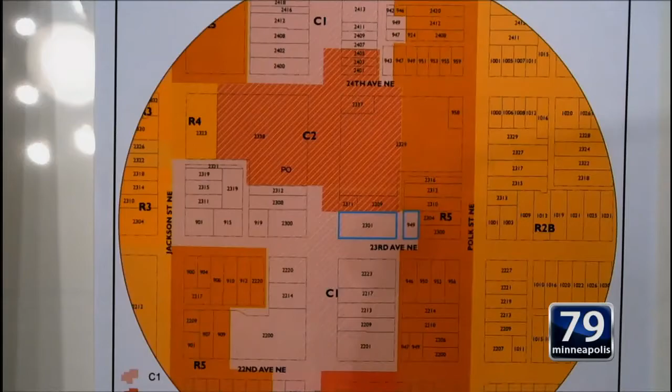There are 7 variances in site plan review. The applicant is proposing a 13,756 square foot 2-story clinic building. Just for some background, the property is zoned C1 Neighborhood Commercial District and is within the pedestrian oriented overlay district. The surrounding property along Central is mostly commercial uses, but there is residential facing 23rd, 24th, and Polk Street.

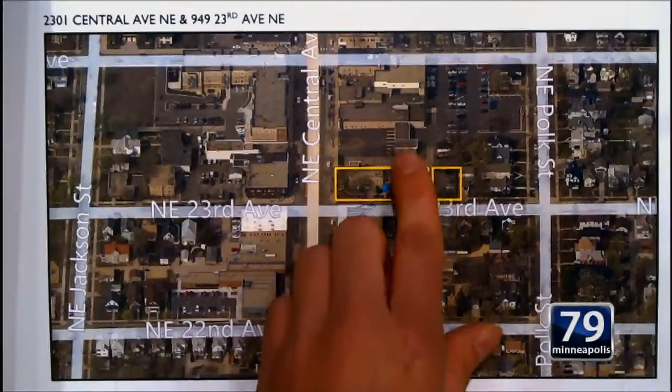The majority of the block, however, is made up of a Wells Fargo bank, their drive-through, and their associated parking lot. The applicant is proposing to demolish the existing building and construct an approximately 13,000 square foot 2-story clinic building. Their on-site parking would be located—let me grab a site plan for you.

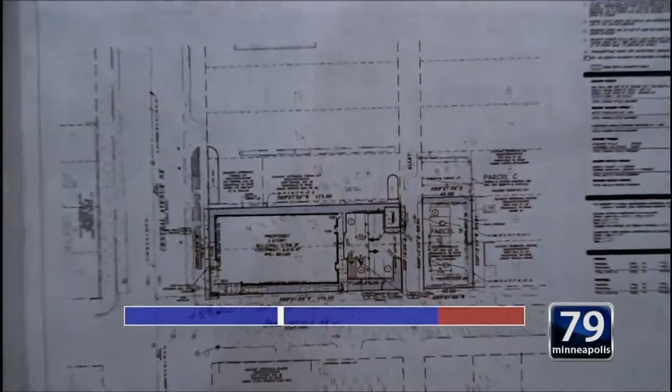Their on-site parking would be located to the rear of the building, about 8 spaces would be there, and then associated parking lot across the alley, that 949 23rd Avenue Northeast parcel would also have 8 spaces.

So this proposal requires 7 variances. The first variance is to increase the maximum size of a commercial use in the C1 district from 8,000 square feet to 13,756 square feet. The next variance is to decrease the minimum off-street parking requirement from the required 19 spaces to the proposed 16 spaces. There's also a variance of the pedestrian-oriented overlay district standards to allow the building to be set back 9 feet 8 inches from their corner lot line on 23rd Avenue Northeast.

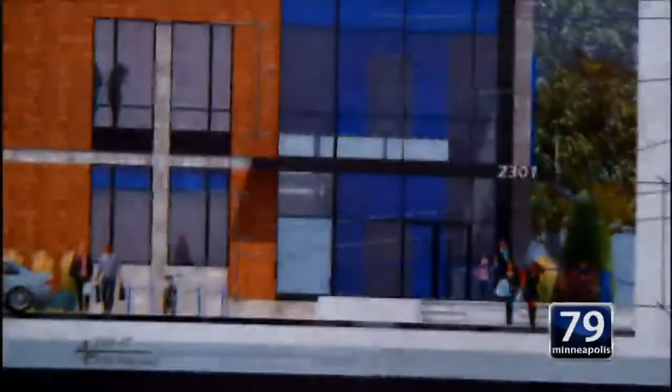And then there's 3 variances for this proposed sign, which would be on the north elevation of the building, which would be the non-primary building wall. And then there's 1 variance of the sign area for this decorative heart that's part of the logo sign on the south elevation.

So staff has recommended approval of the first 2 variances, the variance of the maximum size in the C1 district and the variance of the off-street parking requirement. I can address any questions you have about those, but I'm mostly going to focus on the variances for which we've recommended denial. So first, the variance of the pedestrian-oriented overlay district standard for building placement.

The PO district requires that buildings must be placed within 8 feet of their property line, and if you're on a corner lot, then you have to be 8 feet from both street-facing corner lot lines. In addition, as you're familiar with, the site plan review standards also require that buildings be placed within 8 feet of their property line.

So as you know, there's 3 findings that are required to grant a variance, the first of which is that practical difficulties exist in complying with the ordinance because of circumstances unique to the parcel. As you read in the staff report, staff did not find that there were any practical difficulties in complying with the ordinance. There's also significant policy and ordinance guidance for that 8-foot standard.

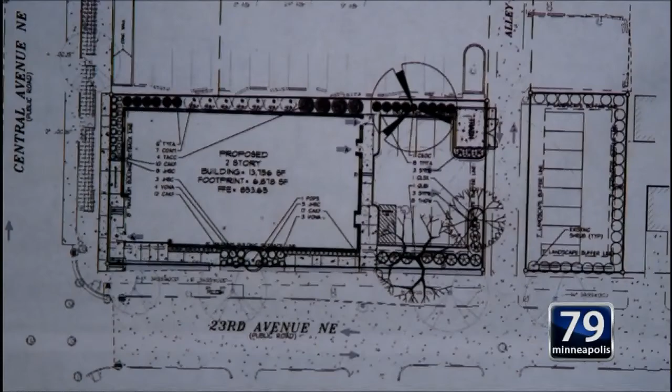Next, I'll talk about the sign variances. Let me go back to this sign. So this is the sign on the north elevation that is a non-primary building wall. The proposed sign is approximately 55 square feet.

So there's one variance for the location on the non-primary building wall. There's a variance for the amount of area on this wall from the allowed 0 square feet to the proposed 55 square feet. Then there's also a variance for the maximum area per sign in the C1 district, which we have established is 45 square feet. So there's the variance from 45 to 55. That's 3 variances for one sign.

Staff is recommending denial of all 3 of the variances, as we did not find that any practical difficulties existed that required the location of this sign on the non-primary building wall, or required the sign to be larger than the allowed 45 square feet.

The applicant has other opportunities for adequate signage and could install a projecting sign up to 16 square feet in area, which would face Central, or they could install the same sign reduced to 45 square feet onto the Central Avenue facade. I'll just note that they have not proposed any signage other than the address for the Central Avenue facade, which is a primary building wall.

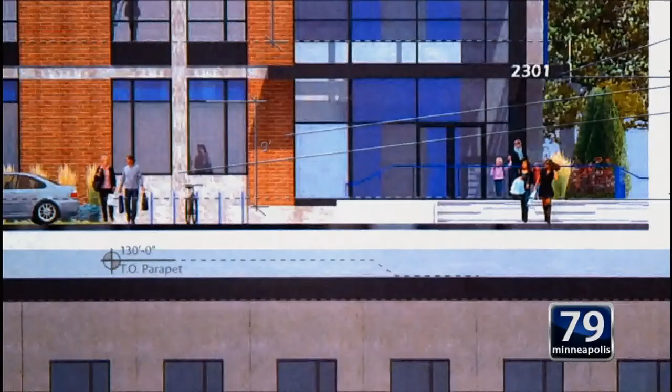Next, the sign on the south elevation, so that's the heart kind of sculptural sign. That sign is approximately 83 square feet in area as proposed. As I said before, in the C1 district, a sign is allowed to be only 45 square feet in area.

The intent for that standard is that the C1 district is a smaller scale neighborhood commercial zoning district, which would not require large signage. Staff also didn't find that there were any practical difficulties in meeting that maximum sign area.

In your packet, I also included this diagram, which shows where 45 square feet would leave that sign if you were to shrink it. Staff found that it would be reasonable to meet the standards in the ordinance and is recommending that the Planning Commission deny that variance.

Finally, to discuss the site plan review items, and just to be clear, in the agenda I think item H is listed as a variance, but it's site plan review, obviously. So the applicant is requesting 3 items of alternative compliance.

The first is building placement, which is also a requirement of the PO overlay district. Since staff is recommending denial of that variance, we're also recommending that the Planning Commission not grant alternative compliance for that building placement. The second item of alternative compliance being requested is compatibility of materials and appearance.

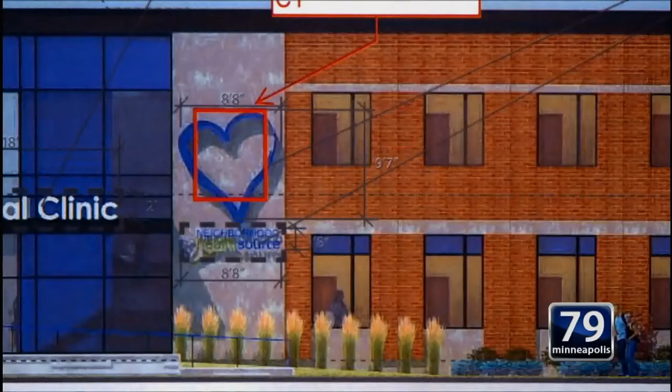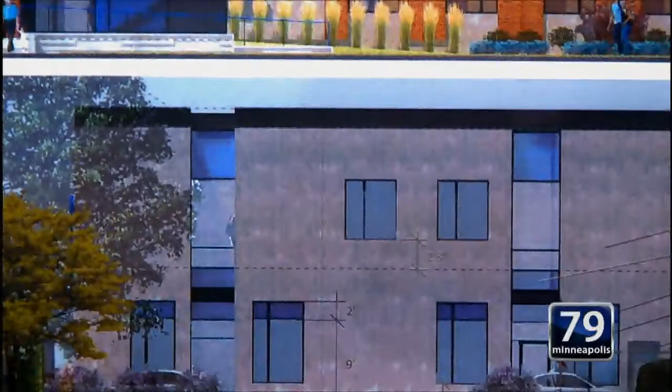The building is mostly precast concrete panel and brick. However, on the east facade, the side that faces the on-site parking lot, the applicant has not incorporated any brick, although all the other sides of the building incorporate brick. So staff is also not recommending that the Planning Commission grant alternative compliance for that, and instead has included a condition of approval that at least 10% of that elevation be brick.

Finally, the window requirement: 30% of the first floor walls facing an on-site parking lot are required to be windows. The applicant's proposal is only 26% windows on the first floor. However, because the applicant is providing windows in excess of their requirement for the second floor, as well as along the north elevation, and additional landscaping, staff found it reasonable to grant alternative compliance for that standard.

So with that, I can take any questions. Okay, let's see, commissioners. Commissioner Gesselman.

Lisa, I just had one question, and this may be for my benefit only, but can you explain what we mean when we use this phrase non-primary building wall? Sure, a primary building wall is a wall of the building that faces a street or an on-site parking lot.

So when it's a non-primary building wall, it doesn't face the street or a parking lot that is owned by or on-site.

Commissioner Kronzer: Just a question on the requirement to include 10% brick on the east side. How did you come up with 10%, and about how much would that be?

It would be about 200 square feet of brick. For the 10%, we evaluated all the percentages around all the different elevations of what they had already proposed, and I believe the north elevation was approximately 11% brick, so 10% was just an even number to be similar to that north elevation.

I'll try not to be too loud, but the adjacent parcel, Parcel B, seems woefully inefficient from how automobiles access and then subsequently probably back out into the alley to get out of that space. How does that Parcel B currently function now?

That's mostly the existing condition. It's not striped right now, so the only proposal to change is to do the striping where they've placed it on the site plan. And because these parcels are separated by the public alley, it's not considered one zoning lot, so the site plan review was really focused on the 2301 Central parcel. It's essentially just an accessory parking lot that we considered based on our design and maintenance standards of parking lots.

And then my last question, is partially the reason for the building to be set back increased because of the need for accessible entries? I think that's part of the intent, but I'll let the applicant speak to whether that's actually a necessity.

That was not included in their application materials as the reason for the indent; it was more of an architectural feature. Okay, thank you.

Okay, other questions, commissioners? Okay, thank you very much. Just for those who arrived a little after 4:30, we have now dealt with all items except for item number 4, which we are discussing. So everything else has been approved per staff recommendation.

So I will open the public hearing and ask first to hear from the applicant on this item. I'll just leave it for you.

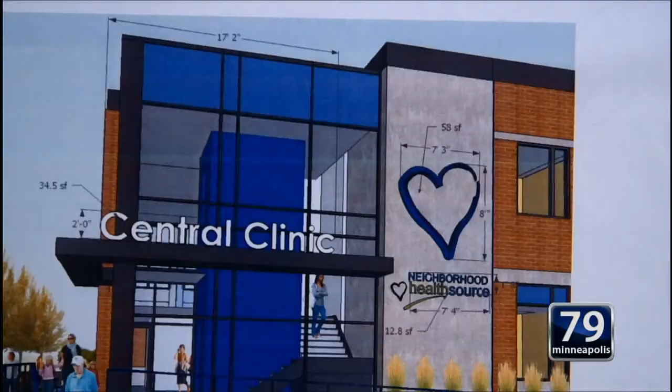Last item that we're asking for your consideration on tonight is this setback issue, and we would like to raise what we believe, again in careful consideration. I can tell you we spent a tremendous amount of time working through the site plan in this regard. And we believe we have a demonstrated practical difficulty with meeting that setback.

The first being the fact that our south and west boundaries are not right angles. They're acute angles, tighter than 90 degrees. So even if we had a perfectly rectangular building to front those 2 sides, we would lose roughly 2 feet along the length of that property. So we'd be down to 6 feet if we held the Central Avenue side, which we assume most folks would want the Central Avenue side held.

The second is a pretty substantial topographic difference between the front and the back of the site, which drives that front stairway to be 4 feet above grade to provide accessible access to the site. We have to hold that 4-foot grade, which requires a fair amount of ramps and compliant ramps to get access to the front door. So you see the predominant space on the south side of the building are those accessible ramps. They travel down from the parking lot to the public way, back up again to the front door. After those ramps come in, you have not a lot of leftover space in our configuration today.

If we were to give up the 1'7", again, we'd have even less to make that transition. So we feel that the topography of the site is a practical difficulty in compliance. The third, to a lesser extent, is the use.

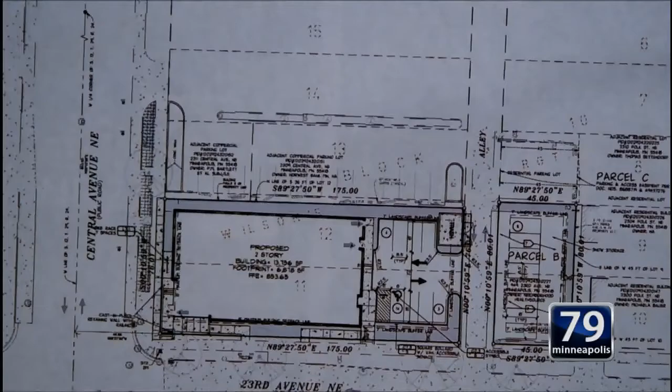And finally, the intent of the ordinance, we believe, is to create that hard urban edge. And if you look at the elevations in place, sorry, come back again. There's a series of retaining walls, again, to make up that grade difference right out on the property line at that curb edge. There's an architectural component around the glass atrium space at that corner.

We believe we have met the intent of the ordinance to provide a little harder urban edge at that corner. And I did not delve much into the architecture. We can if you have questions or interest there, but the majority of the budget on exterior architectural finishes was spent at this corner. This glass piece, that atrium, the canopy, the brick, those architectural components, including the walls out at the property line, that's where the bang was. That's where the dollars were spent, and that's where that energy is.

So we pulled that as tight as we could to the street sidewalk edge. We still have to provide practical access to the front door, so we have those retaining walls and so forth in there. So we, again, believe that the intent of the ordinance is met.

So again, on that 8-foot setback issue, we have pretty strong neighborhood support on that front. We believe the practical difficulty is the acute angle of that property, most significantly the 4-foot topographic change from back to front of the site. And again, I think it meets the intent of the ordinance and it's conducive to the use proposed.

So that will stand for any questions, as I promised. I know we're the only item we have today, but okay, let's see if anything else comes up, we'll be glad to answer. Commissioners, Commissioner Kronzer?

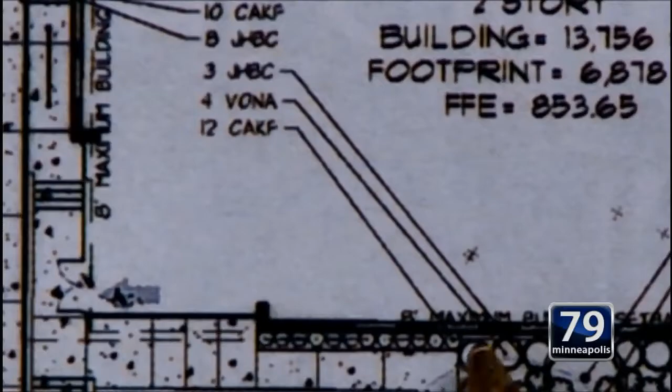So you can see they've drawn the hatched line as the 8-foot setback. They are meeting it for most of the building wall until about here, then it starts to deviate because the building is square. The setback's parallel to the street, so that's why it's kind of at an angle. Well, the setback would be parallel to the property line. So that's why it doesn't follow. Right.

And so a majority of the building that is not meeting this is primarily just that front corner glazed area, from here to like around here. And if it appears, from my perspective, that the building still kind of is canted a little bit off the property line through the rest of the building, so it starts out at the mark, and then it kind of tapers greater and greater till it gets to that point. Is that accurate? Yeah, that would be accurate. I think they might be a little bit even closer than 8 feet at the very end of the building, or the very east side.

So then, is it possible for you to tell, what is the actual setback of the glazed lobby from the brick facade of just the building itself? Like if it had been continuous with the brick, it still wouldn't meet the setback at that corner, but how much farther is it because it's set in? It's probably 1 or 2 feet different to that brick, just because of the tapering, depending on where that line is. But I can answer that maybe.

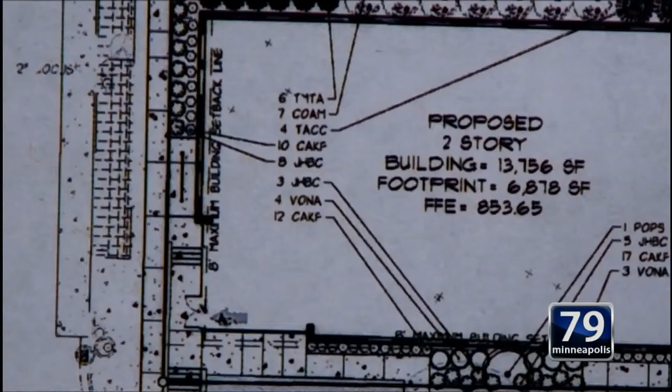Yeah, sorry, I'm just curious. Can I clarify that? Please do. Yes. Sorry about that. So appreciate the opportunity to do that because I think it gets fairly complicated.

So the angle of this street is not at a right angle, so it gets closer and closer to our building as we go down the street. We started with this point right here and set that on the 8-foot mark. And then as you travel east, it gets closer and closer to the street, where it finishes at about roughly 6 feet here. So the average setback along that entire edge is well under 8 feet.

The only portion of the site that we're proposing to be outside of the setback is the glass portion from here to here, you can see where it jogs in. It's a very important architectural component to set that glass back from that edge. What dimension does it jog in at? How far does it jog back? 1 foot 7 inches. Okay, so there's just enough relief to create that architectural component.

So we set this point right here on the 8 foot, and then it goes 7 down to 6 feet as you travel down the length of the building. So just this portion is beyond 8. Thank you.

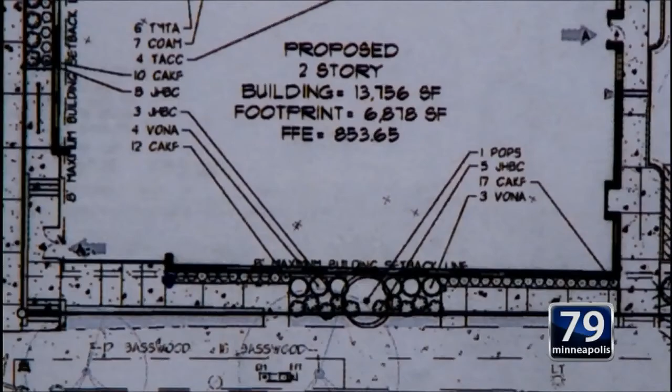While you're up here, a question. The canopy sticks out a little bit beyond the brick, is that correct? Correct, that was the intent component we had. The canopy comes out into the setback on both sides and then back again. So that piece is in the setback, as well as the retaining walls that you see in the elevation, all the way along. Are the retaining walls at the property line? They're right on the property line, or just inside it. So that front is held at that corner.

Commissioner Kronzer, you had a question? A comment. I do think the skew of the property is a practical difficulty, especially with the canopy and the retaining walls holding that edge. I would hate to see just a plain box of a building if we deny this variance request. Commissioner Lipke here, I concur with Commissioner Kronzer. I think the intent is there, and there's a special circumstance given the skew of the property line and the street. I think it meets the intent based on the wall and canopy, and the setback at that corner might make for a more inviting pedestrian experience given the transparency and glazing. So I will not be supporting this motion.

Okay, are there other comments? Commissioner Gisselman? I would agree with Commissioner Kronzer and Commissioner Lipke here, and I realize I was the one who seconded Commissioner Brown's initial motion, but considering the further explanation we just got, I also won't support that form of the motion. The commissioner, the second just gets the item up for discussion, doesn't? You don't have to stick with it.